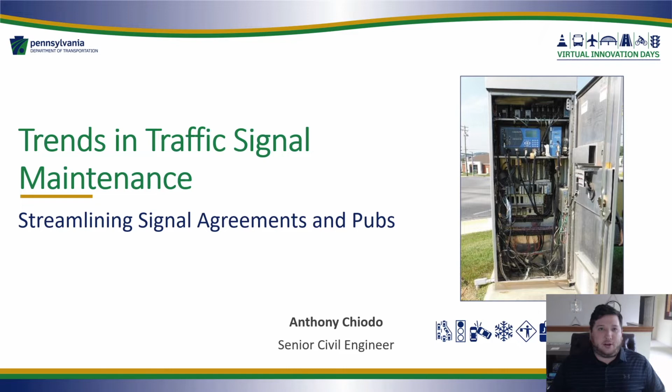Today I'm going to be presenting on trends in traffic signal maintenance. This mainly covers a project that we did back in fall of 2019 with Michael Baker. The main point of the project was to streamline our traffic signal maintenance agreements, as well as update some of our traffic signal maintenance publications.

We also wanted to improve the current traffic signal maintenance agreement process. This involved working with municipalities and consultants and getting a lot of feedback to see what the current process was, how the districts are doing it, and making sure we could streamline it.

To make it a quicker, easier process for all of our municipalities and districts. We also wanted to make sure, as part of this project and making sure that information was correct, that we verified traffic signals are operating per their permit.

This is important because our permits designate signal timings, where equipment should be, and when all this is in place correctly, it ensures that the traveling public gets to where it needs to go safely in an effective manner. Making sure that all that's in line is very important to us.

We also want to encourage our municipalities to do preventative maintenance on their equipment. This is a big step because even though it may be more of an upfront cost, it's important because in the long run, the municipality would probably see savings, especially in cases where if say a traffic pole is neglected for a while and there's a catastrophic failure.

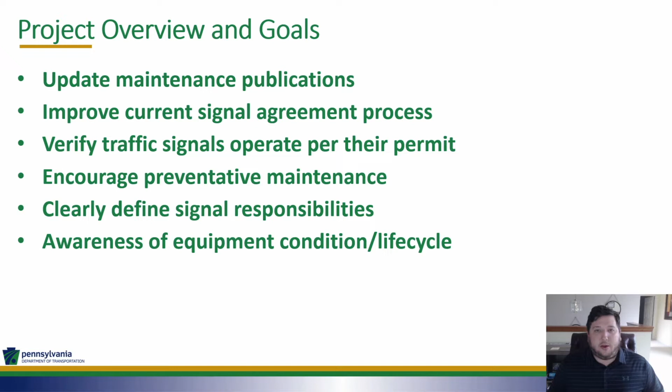So having all this data stored in TSAMs and making municipalities and districts aware of it really helps us from a central office standpoint, as well as gives all that data and information to their respective users as well. It was a big part of this project.

This also includes changes and updates to the TE 160 form, which is what municipalities submit to districts whenever they want to construct a new signal or make modifications to a current one.

The main point in streamlining the signal agreement process is that the TE 160 was revised down to one page and would no longer require a municipal resolution moving forward, but we'll go further into that in a future slide.

Another part of this project, and an ongoing effort of ours in the traffic signal unit, is increasing TSAMS user friendliness. I realize I may have neglected to say what TSAM's stands for in a previous slide.

TSAMS is our Traffic Signal Asset Management System. It's a free site software for municipalities and for us to store traffic signal information, whether it be projects, specific intersection information, permits, or anything traffic signal related — it should be found in TSAMs.

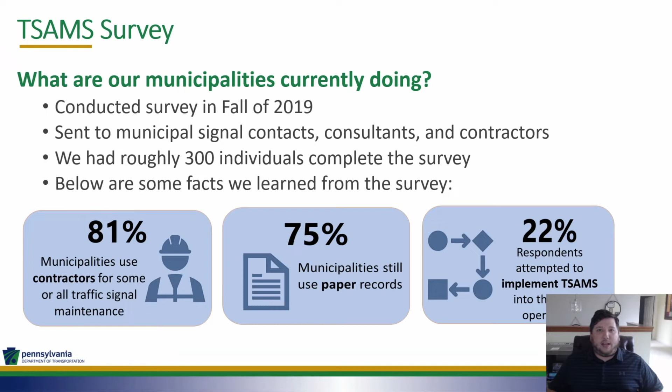The new process we came up with during this project was for municipalities. They would have to go through one more agreement with the state, or sign into a new agreement with us. In this new agreement, the municipality would designate a position within the municipality, whether it be the head of a road crew or the director of public works—whatever position is most relevant for each municipality—to approve their signal permits and to sign off on the TE 160s.

Once they've designated that position and agreed to the other terms in the agreement, they would accept the new agreement with the municipal resolution. From there, they've entered the new process where instead of having a municipal resolution to pass new TE 160s, they could just have that designated position sign off on the TE 160, send it to PennDOT without going through municipal resolution, and update that data in TSAMs, making sure everything is in there correctly.

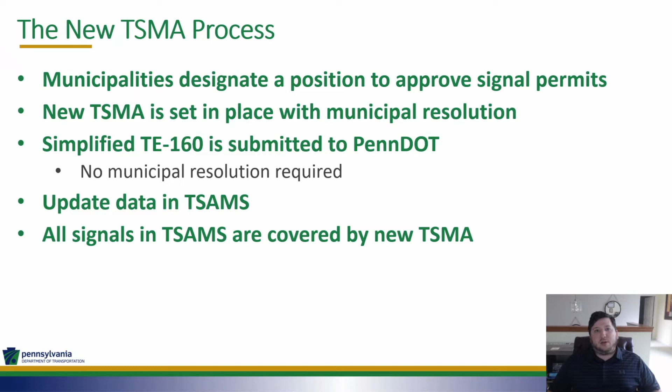As part of the new agreement, there's no longer an appendix list of intersections in the municipality. Any signal in TSAMs that is linked to that municipality is considered part of that traffic signal maintenance agreement. So as long as the list in TSAMs is up to date, the traffic signal maintenance agreement itself is up to date, which was a nice stepping stone for this project.

This is still an ongoing effort though. We're still waiting to get municipal agreements back from a lot of municipalities. We started collecting these earlier this year. We have roughly 1,200 municipalities that own traffic signals in the state of Pennsylvania, and we have about 100 maintenance agreements back now. So we're constantly collecting those, going through the Office of Chief Counsel, making sure these agreements are put in place and that we're going by the books on it.

We're also going to gather feedback from these in the future, and if there's anything policy related that can be updated or changed based on feedback from our current practices, we'll use that to update and maintain our policies moving forward. It's also important to continue to collect and improve data in TSAMs. This is always an ongoing effort in our section, and we've seen an uptick in some data being collected by municipalities after these agreements have been put in place, so that's good.

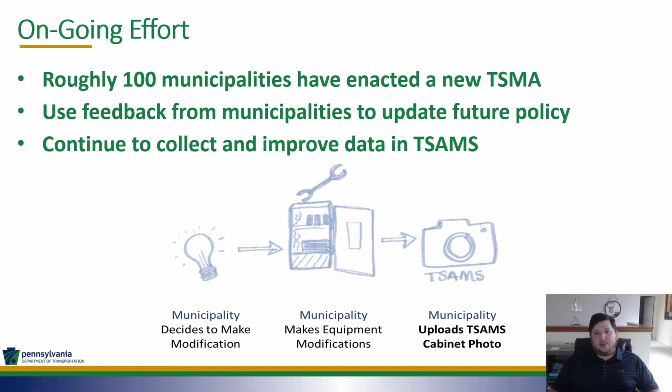At the bottom of this page is a little hand-drawn diagram of the thought process when it comes to inputting data into TSAMs for the municipalities. They decide to make modifications, they make those modifications, and as part of the agreement, they upload a cabinet picture into TSAMs. This makes sure that at the very least we have data in TSAMs that shows what's in the cabinet, and that's important data to have, because for those who know what they're looking at, being able to see a recent picture inside the cabinet really gives you a good idea of what's in there.

Some lessons learned from this project and some COVID adaptations we had to make. Communication is key. This is probably a lesson learned from every project out there, but it's still worth noting. When you're working with so many different stakeholders and people, it's important to be aware of what everyone's going through, what everyone's thinking, and make the best decisions based on the input you have. It's important to keep that communication up between all parties involved. Based on that, collecting feedback while keeping up communication—see how people feel about your changes, what makes sense, what doesn't. Anything you gather, you can use in future updates, future projects, and to streamline your own processes.

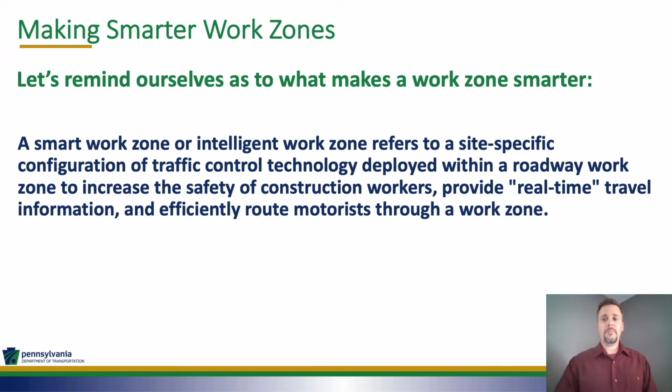As defined by the United States Department of Transportation, there are 5 strategies that can be incorporated to make work zones smarter. Those strategies are speed management, traveler information, reducing exposure, managing traffic, and performance monitoring.

As you might expect, PennDOT has already begun to utilize smart work zone technology that complies with the categories discussed on the previous slide. While some approaches are more visible to the public eye, such as late merge and automated speed enforcement, other approaches, while beneficial, are not as easily recognizable. Queue warning systems, as managed by our Transportation Systems Management and Operations Unit, have been deployed on several key corridors across the Commonwealth, with noticeable success.

However, what I would like to discuss today is a recent pilot of smart work zone devices that occurred along a safety corridor project in Lycoming County within PennDOT's Engineering District 3.

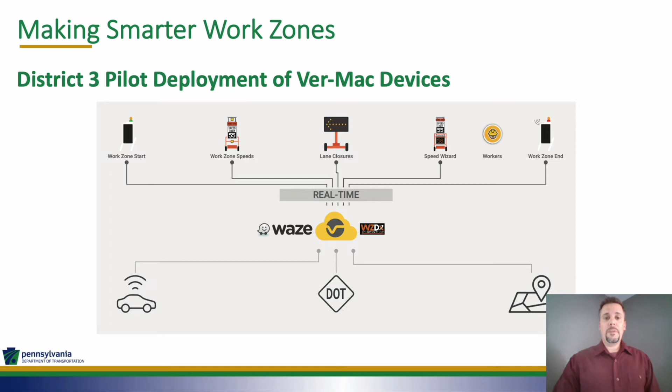Earlier this summer, a national manufacturer of work zone devices requested to share with the department, as well as the Pennsylvania Turnpike Commission, some items from their new product line. These products meet the definition of smart work zone devices because they can provide real-time data and situational awareness within active work zones by communicating via the cloud to the work zone data exchange, as well as third-party vendors such as Waze and Google and others. This critical information can then be communicated to approaching road users via their smartphone devices, as well as directly to the department and the commission through their ATMS platforms and the PA 511 Traveler Information System.

Since the department saw the benefit of deploying one or more of these devices along an active work zone for the purpose of gathering information and providing solidification of data we are already receiving through other platforms, such as our automated speed enforcement program, rather than taking the parking lot approach by simply walking around the devices and kicking the tires, we worked through a regional supplier that works with the manufacturer and requested to place several of these devices on an agreed project to witness the benefits for future use.

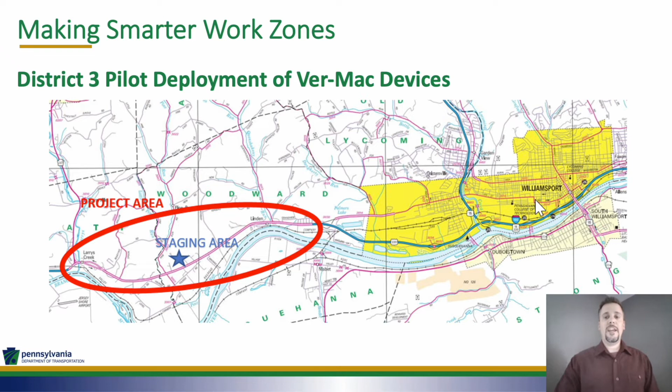The project that was selected is along the US 220 corridor between Jersey Shore and Williamsport, Pennsylvania, in Lycoming County. This project consists of multiple work areas within a 6 to 7 mile stretch that has long-term lane shifts, one or two long-term lane closures, as well as intermittent short-term lane closures throughout any given point of the week. This route is a north-south commuter route that garners at least 20,000 vehicles per day or more.

Of the products available by the manufacturer, on the screen are 4 devices that were selected by the department and the commission for the pilot deployment on the project. Through the remaining slides, I will get a little more detail on each device and how they were deployed, and then I'll wrap up by discussing some of the successes and challenges we observed during use of these devices as part of this pilot program.

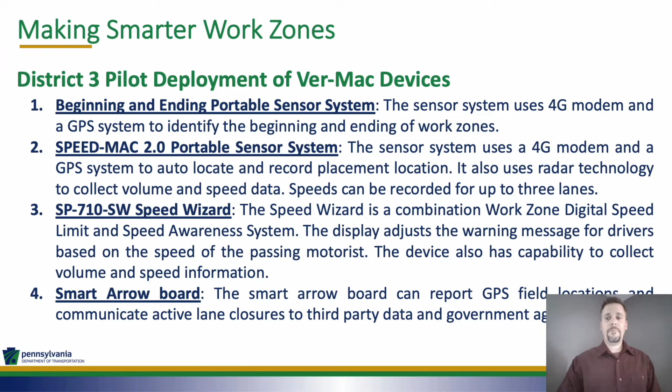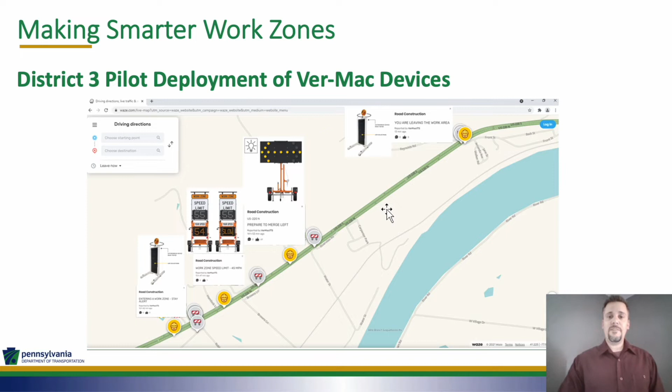For the deployment of smart work zone devices, the Bureau of Maintenance and Operations worked with the vendor, the supplier, the District 3 project staff, as well as the contractor to develop the locations where these devices could be deployed. In some instances, existing devices such as arrow boards and speed display signs that were already part of the project were simply removed and replaced with the smart work zone devices that effectively perform the same functions, but in an enhanced capacity.

The first device we're going to talk about is the beginning and ending portable sensor system. This system looks much like a traditional Type B light that is historically installed on signs and channelization devices. However, rather than illuminating, they contain a 4G modem and a GPS system that communicates through the work zone data exchange and through the cloud to push notifications to road users related to where a work zone begins and where a work zone might end. This information can be communicated to road users through Waze and Google applications, with the intent to eventually communicate through an autonomous and connected vehicle system.

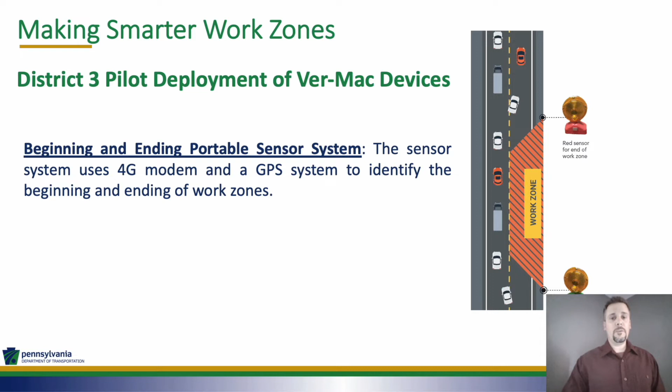Much like the beginning and end portable sensor system, we also deployed a SPEED-MAC 2.0 portable sensor system that utilizes a Type B light housing unit, which can be attached to a MASH compliant solar vertical panel. The sensor system also uses a 4G modem as well as a GPS system to auto-locate and record placement location. It also uses radar technology to collect volume and speed data, with speeds recorded for up to 3 lanes of traffic. This system was useful in providing field verification data collected through the automated speed enforcement program, as this project has been identified as an ideal candidate which sees regular automated speed enforcement throughout any given week.

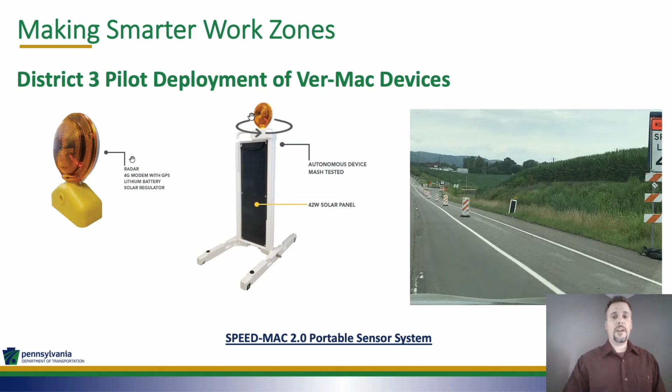The Speed Wizard is a combination work zone digital speed limit and speed awareness system. As you can see, it looks much like our standard speed display signs that are deployed among many of our work zones across the Commonwealth, as well as utilized by many safety sections within PennDOT to help enforce lower speed limits in communities and along school areas as well.

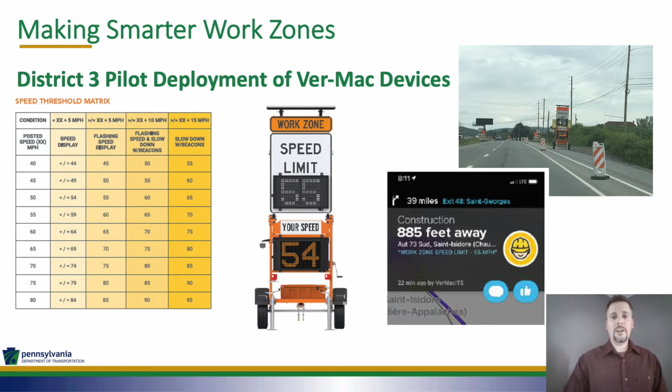The lower speed display adjusts the warning message for drivers based on the speed of the passing motorist. By using a matrix as shown on the left side of this slide, the Speed Wizard's lower display can adjust based on this speed threshold provided by the posted speed limit on the above display. If a passing motorist violates a certain speed threshold, the numeric display can change to read 'slow down.' The device also has the capability to collect volume and speed information, which can again be verified against our automated speed enforcement program for its capabilities, verification, and accuracy.

The last device I want to talk about is the Smart Arrow board. For most people, including the work crews and road users, the Smart Arrow board does not look any different than any standard arrow board. In fact, the work crew installs and activates it just like any standard arrow board. However, the Smart Arrow board can report GPS field locations and communicate active lane closures to third-party data and government agencies.

This is achieved via a modem and a GPS unit attached to the back of the arrow board. When activated, it instantly begins pushing information to the work zone data exchange and cloud services, reporting its location and its current mode, meaning left lane closed, right lane closed, or caution mode. The Smart Arrow board will also report any changes to its position and which mode it has been changed to, whether it changes from a left merge to a right merge, instantaneously.

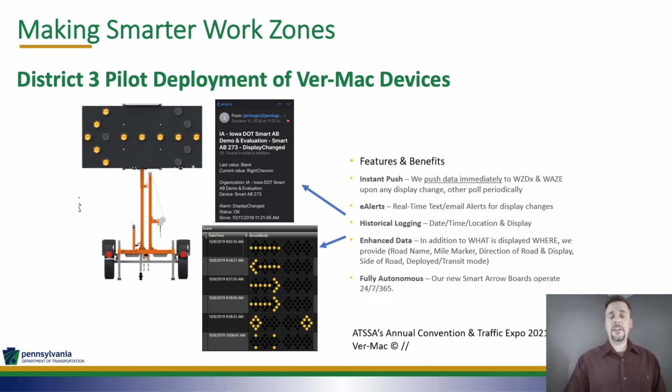Project management personnel can receive text alerts to its location and merge mode upon activation, modifications, and deactivation throughout the course of the day. This also helps ensure motorists are seeing the proper work zone messaging as they approach, so they can adequately and appropriately adjust their speeds, their driving behavior, and if need be, change lanes prior to getting to the merge point of the work zone.

So lastly, successes and challenges. Of the devices that we discussed here this afternoon, on the left side of the slide you see some of the successes. First and foremost, I want to thank District 3 staff as well as the contractor staff for being willing to work with us on this pilot program.

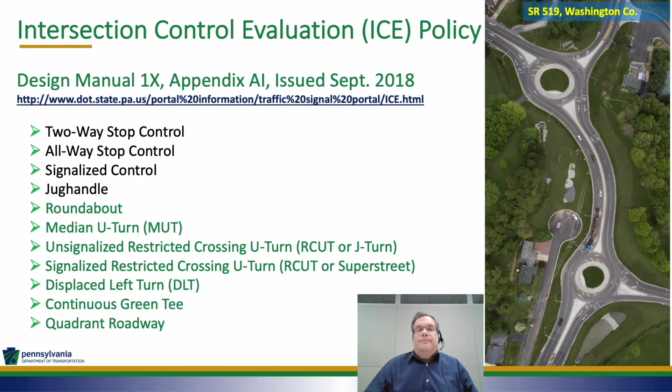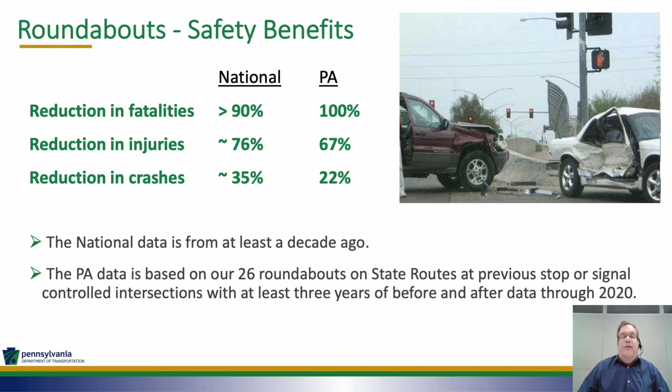But you have to keep in mind there are other benefits to roundabouts. They can be up to 30% more efficient than signalized intersections during peak times, and you have pretty much no delay during off-peak times. They also reduce emissions because of the nature of the continuous flow. They have significant traffic calming benefits because they geometrically restrict the speeds of vehicles. And there's beautification aspects for gateways to communities and so forth.

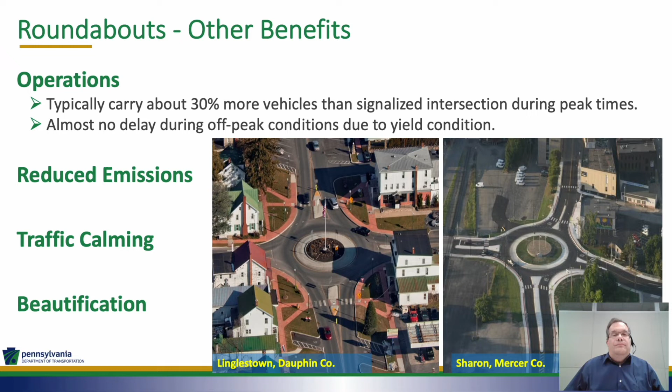As far as roundabouts being implemented throughout the state, we built our first roundabout in 2005. We now have a total of 62 roundabouts currently on state routes, 77 overall within the state, 20 more in construction that aren't open to traffic, and another 30 or more in design.

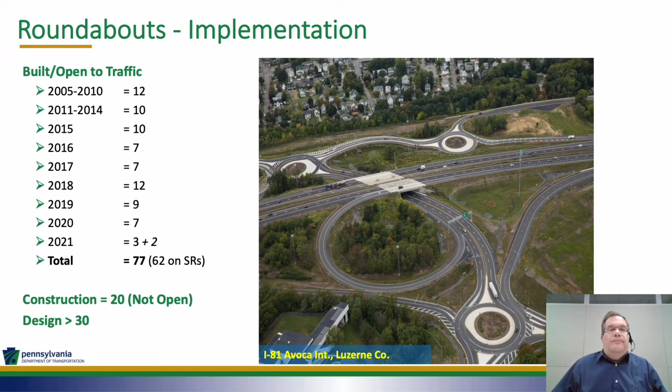Other innovative intersections, from the previously shown list, that should be considered for significant intersection upgrades: median U-turns, restricted crossing U-turns, displaced left turns, continuous green Ts, and quadrant roadways. The Federal Highway Administration has a guide for median U-turns, restricted crossing U-turns, and displaced left turns, which you can find on their website.

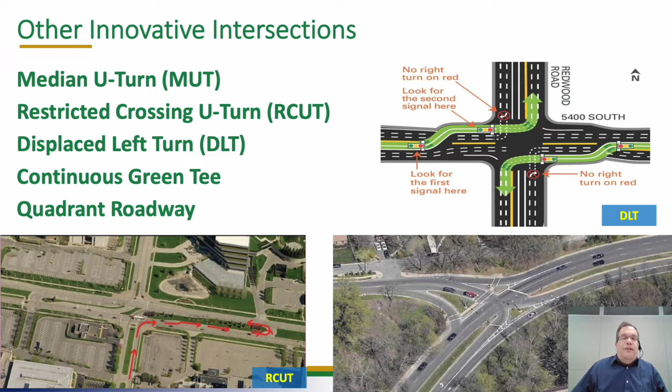As for diverging diamond interchanges, similar to the other innovative intersections, the primary idea is to get the high left turning traffic volumes to turn while the through traffic in the opposing direction continues to travel, avoiding excessive delays. They also improve safety by having fewer conflict points than typical signalized intersections. And frequently they use up less right of way than other interchange types.

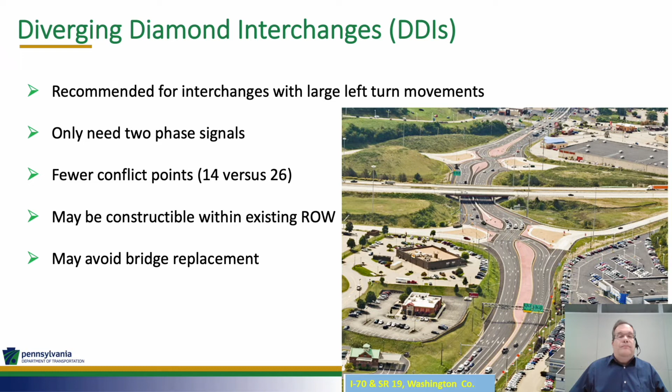DDIs have been built throughout Pennsylvania and are under design. Our first one was in Washington County on I-70 at SR19, which opened back in 2016 and is performing quite well. Two recently opened in District 8, one at I-83 Exit 4, and the other at SR322 and SR222 in Lancaster County, which you'll be hearing a presentation on here briefly.

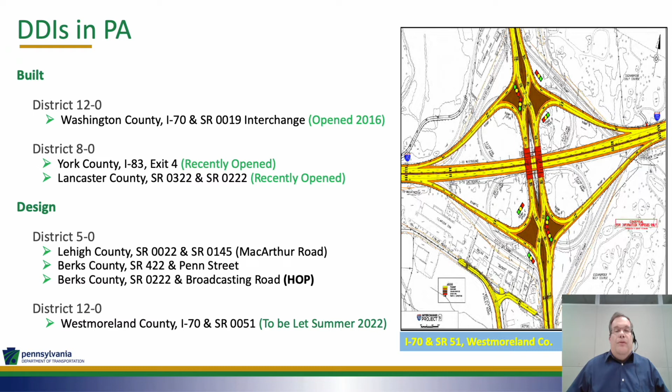And under design, there are several in District 5, and the image shown here is of the one proposed in Westmoreland County in District 12 that is to go to construction next summer.

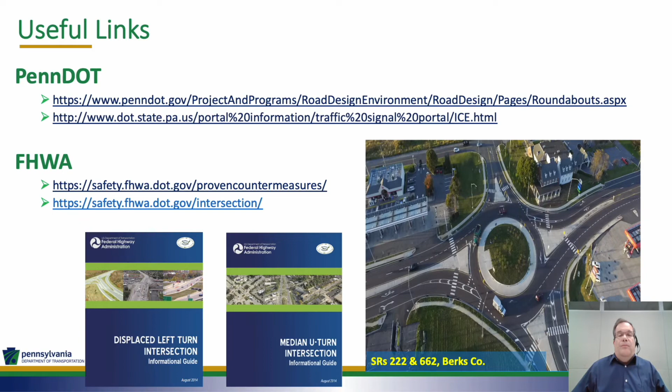Here's some useful links. The first one is the link to the Roundabout website within the PennDOT website. The second one is the link to the traffic signal portal, which I mentioned earlier. And then a couple links to the Federal Highway Safety website. The first one will go over roundabouts, and the second one will cover various other intersection types, including displaced left turns and median U-turn intersections.

We wanted to start off by mentioning the team that worked hard to produce this successful project. Our project team was led by Dave Fertangeli of PennDOT District 8, who was unfortunately unable to join us for this presentation. Barb Karsak-Anderson led the PennDOT construction team. Our consultant design team was led by WRA, with assistance from Stantec Consulting, Wallace Montgomery, Skelly & Loy, Susquehanna Civil, and SAM. Finally, the contractor for the project was JD Eckman, with CM High and Signal Control Products as key subcontractors.

Now, let's touch on the project history and project location. The project is located at the existing SR322 and SR222 interchange, just east of Ephrata in Lancaster County, District 8. The project was initiated in July 2013 as part of a road safety audit, which recommended an interchange alternative analysis be performed. In December 2013, a DDI feasibility study was performed that determined a DDI would be a feasible solution and provide safety and operational improvements.

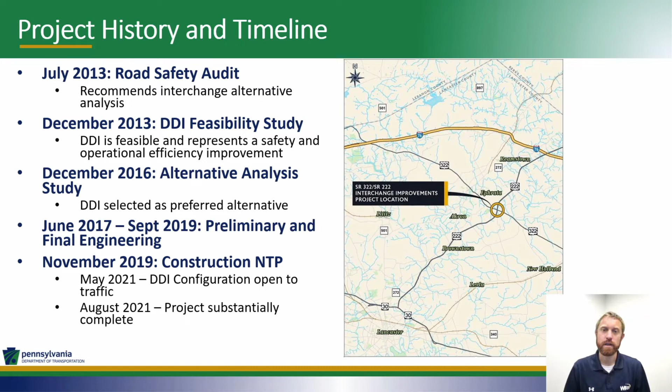In December 2016, our team completed a comprehensive alternative analysis study. Following the study, PennDOT selected the DDI as the preferred alternative. From there, the project spent a little over 2 years in design, and the construction NTP was issued in November of 2019. In May of this year, the DDI opened to traffic, and the project is now substantially complete.

The primary purpose of the project was to improve safety. After reviewing the crash history at the interchange, we felt that the best way to accomplish our goal of improving safety was to: 1. Reduce the number of conflict points within the interchange, which naturally reduces the opportunity for accidents to occur. 2. Eliminate the SR322 left turn and opposing through movement conflicts through the interchange. The existing crash data indicated that this conflict resulted in 43% of the angle crashes and 43% of the rear end crashes within the interchange.

3. We wanted to reduce the number of and severity of future crashes. The existing crash data indicated that 46% of the crashes resulted in injuries.

While our primary purpose and need was safety, we also identified 2 other project objectives. We wanted to improve safety, but we didn't want that to come at the cost of degrading traffic operations or multimodal transportation. For traffic operations, we wanted to reduce queuing on SR322 as well as the off-ramps from SR222. As for the multimodal operations, we recognize the importance of ensuring that pedestrians, bikes, and unique to this particular project, horse and buggies, were accommodated due to the significant presence of the Plain Sect community in the area.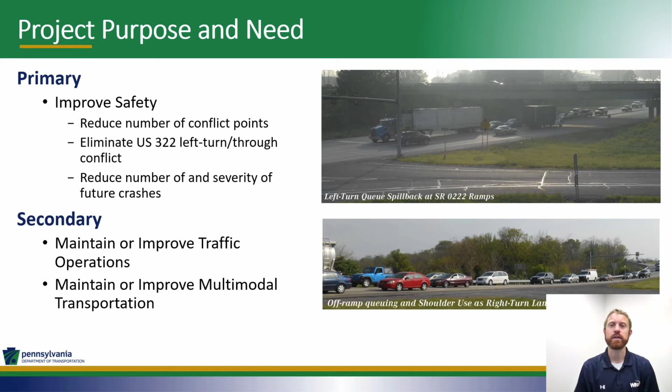After diving into the project, we developed a more specific list of issues that we wanted the project to address. With the goal of the project being to improve safety, we wanted to address the high number of reported injury crashes due to the frequent angle collisions at the SR322 intersection with Sheetz Walmart, as well as for the unprotected SR322 eastbound to SR222 northbound movement due to the lack of a traffic signal.

From a traffic operations perspective, there were frequent backups on SR322 eastbound at the Sheetz Walmart intersection. Short left turn lanes cause traffic to routinely back up into SR322 travel lanes in both directions, which also becomes a safety issue. On the SR222 off-ramps, a lack of a formal right turn lane leads drivers to use shoulders, and traffic routinely backs up on the ramps during peak periods.

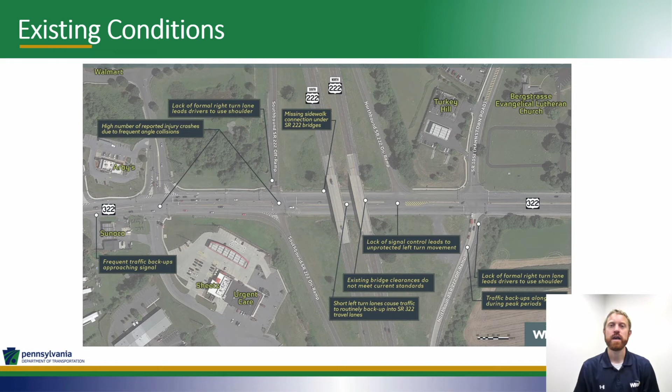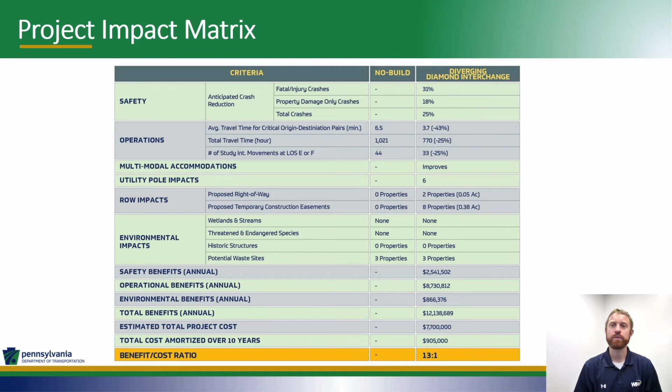In addition, we wanted to address the missing sidewalk connection under the SR222 bridges and also improve the substandard bridge clearance. Our team initially investigated 5 alternatives before settling on 3 alternatives for further development. After comparing the 3 alternatives, it was decided that the DDI met the primary and secondary purpose and needs, and also provided a 13-to-1 benefit to cost ratio, which was the best of the 3 alternatives.

The major benefits of the DDI compared to the other alternatives is that it improves safety by reducing the number of conflict points from 28 to 14 as compared to the current diamond interchange. It reduces travel delay by utilizing 2-phase traffic signals with short cycle lengths at the ramp signals. It increases the capacity of the turning movements on and off the ramps. It utilizes the existing SR222 bridges and generally maintains the same footprint, thus requiring minimal additional right-of-way. Finally, it also accommodates multimodal transportation, which, given the presence of the Plain Sect community, was a critical component to the project.

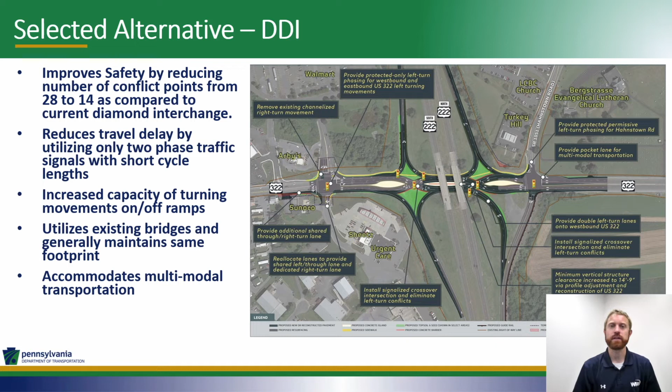We wanted to take a minute to quickly explain how the DDI works for those that may not be familiar with how one functions. The graphic on this slide shows how all of the movements are made in a DDI. The DDI is unique from a standard diamond interchange in that traffic on the minor road,

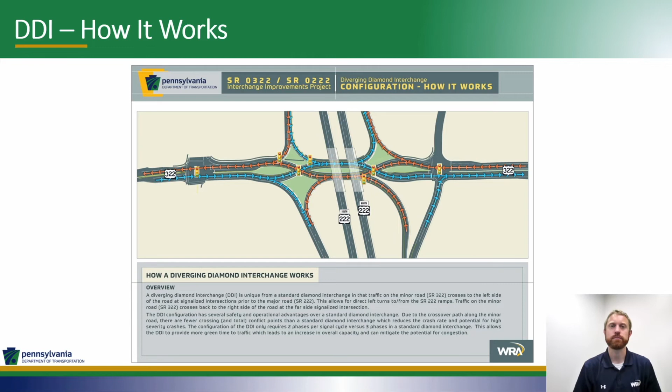which in this case would be SR 322 running left and right on your screen, temporarily crosses to the left side of the road via signalized intersections on either side of the major road, which in this case is SR 222. This allows for direct left turns to and from the SR 222 ramps without crossing conflicts with SR 322 traffic. Traffic on SR 322 then crosses back to the right side of the road at the far side of the signalized intersection.

Now let me get into some of the nuts and bolts of the geometric design considerations for the project. Since this project is at the interchange of two major state routes, we had to ensure that larger design vehicles, such as WB67s, could make all movements and run concurrently with other vehicles. Similar to roundabout design, this requirement was often at odds with the necessary curvature of the roadways, which required careful placement of curb lines.

Secondly, and possibly most critical to a DDI's geometry, is the design of the crossover intersections. A 45-degree crossover angle was selected, which is the recommended minimum value to deter wrong-way maneuvers.

Due to the location of the nearby Sheetz, Walmart, and Hahnstown Road intersections, the tangent length between crossovers had to be kept to a minimum, which in this case was between 120 and 130 feet. This provided greater and more desirable spacing from the adjacent intersections, and fortunately, the wider resulting cross-section could be supported beneath the existing SR 222 bridges.

A review of natural vehicle paths through the crossover intersections was performed to evaluate the potential for path overlap. Finally, concrete glare screen was strategically placed within the median between crossovers and on the right side of the near side approaches to create a blinder effect and impede the view of opposing traffic as drivers cross over to the left side of the roadway.

Ramp design was also critical to properly align with the crossover intersections, and a new SR 222 northbound ramp spur to SR 322 westbound was added, which provided a more direct route for that movement and improved operations at the Hahnstown Road signal. The final design element I wanted to mention is the vertical clearance under the SR 222 bridges.

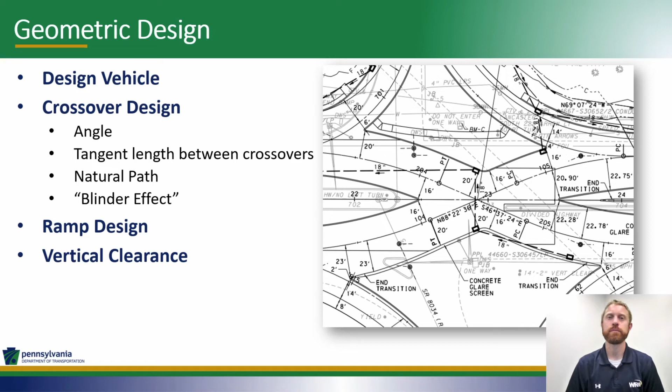Thanks, Brett. In addition to unique geometric design considerations of the DDI design, we wanted to highlight some traffic design elements of the project. Due to the closer proximity of the DDI crossover intersections, progression between both crossovers is critical to operations. Therefore, one traffic signal controller was utilized to control both crossovers.

Traffic signal timings emphasize queue management and progression for critical interchange movements. Other traffic signal design elements included the installation of radar detection and emergency preemption.

Left turn phasing at adjacent signals utilized flashing yellow arrow indications to maximize both safety and operations. The project also included the installation of a CCTV at the interchange and took an innovative approach to backhaul communications by utilizing a shared connection for the CCTV and traffic signal system that eliminates long-term service costs for the municipality.

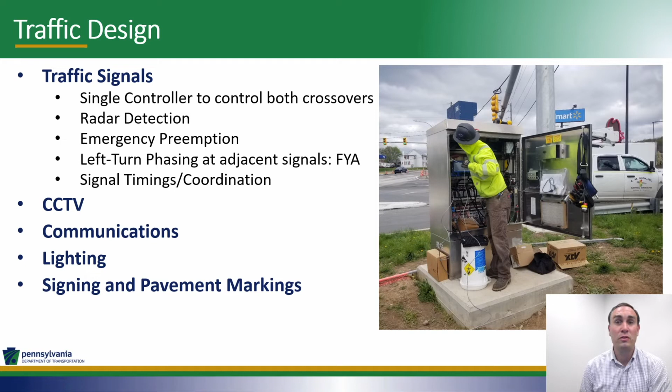Lighting was also installed along 322 and at critical ramp decision points. Enhanced signing, including overhead guide sign structures along 322, were installed, and recessed pavement markings were provided for improved long-term durability.

As mentioned previously, ensuring appropriate multimodal accommodations was a priority of the project, especially due to the large Plain Sect community that utilizes 322. The project improved pedestrian connectivity and accessibility along 322 through the project limits by completing a missing sidewalk connection and installing and upgrading pedestrian facilities to meet ADA guidelines.

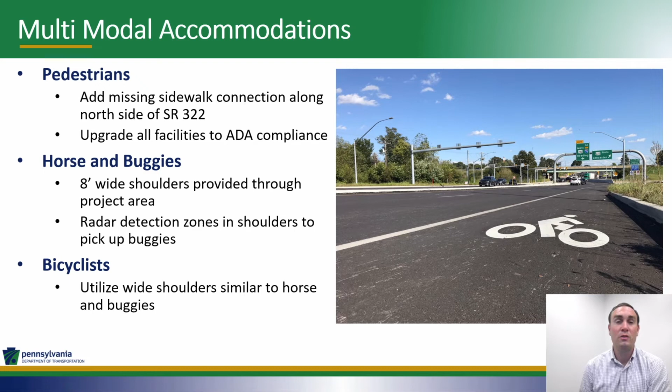8-foot wide shoulders were provided throughout the project area for bicyclists and horse and buggy traffic. Radar detection zones were included in shoulders to detect horse and buggies so the traffic signals could work correctly during periods when vehicular traffic may be lower.

Based on feedback received following outreach events, attendees felt more comfortable with the DDI as the correct solution. Because the Plain Sect community travels through the DDI using non-vehicular modes of travel, we met with them specifically to show how we envision pedestrians, bicyclists, and horse and buggy traffic navigating the DDI. We wanted to make sure the facilities being designed would be used as intended. The Plain Sect community agreed with all of the project's provisions and were very appreciative to be involved in the design process.

We wanted to share a few items that could be considered with future DDI projects. The first relates to having lighting installed in advance of the DDI switchover. Our schedule provided sufficient time to allow for installation of the permanent lights prior to the switchover. However, excessive pole fabrication delays and accelerated construction due to COVID-19 presented an unexpected challenge. In response, we performed a photometric analysis to determine a low-cost temporary solution to ensure the interchange was lit for the traffic switch without delaying the overall construction schedule.

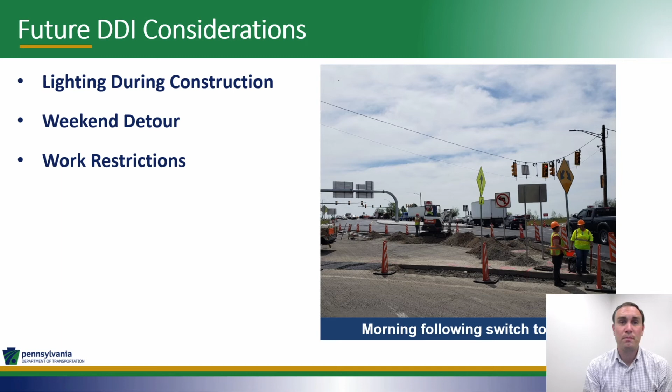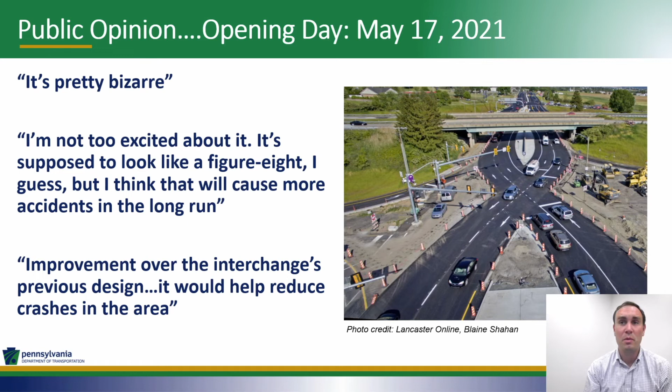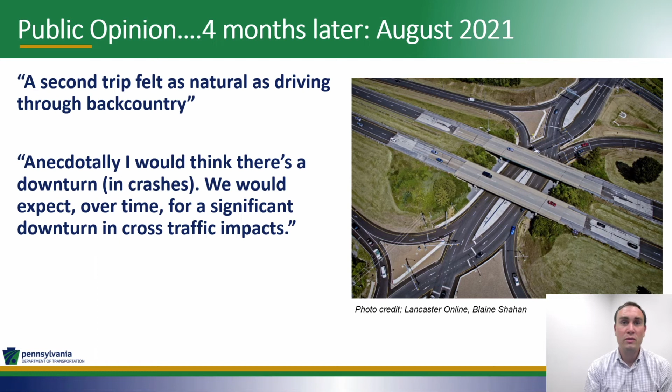The DDI was opened to traffic on May 17, 2021. As expected, public reactions were mixed, as the traveling public used the DDI for what was likely their first time in an interchange of this type. Observations and minimal complaints over the next few days indicated the public was navigating the DDI successfully. Fast forward four months to August of this year, and overall the reviews seem positive, with drivers becoming more familiar with the interchange. Although it's too early to tell the long-term safety performance, left-turn and angle crash types appear to be minimized.

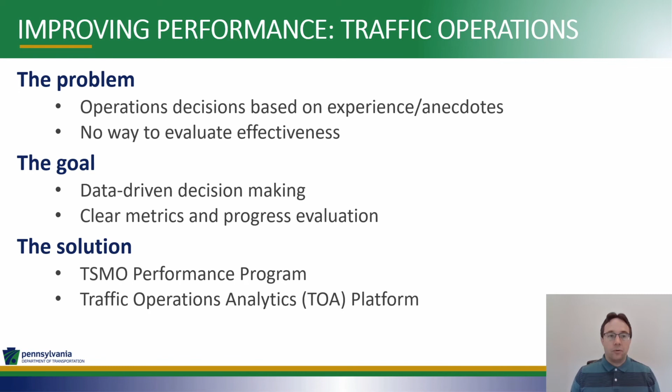As a result, the PennDOT TSMO Performance Program was created, and one of the first efforts of that program was the development of our Traffic Operations Analytics, or TOA for short, platform. Our goal in creating the TOA platform was to bring together a variety of data sources that would better help us understand where crashes and other traffic incidents were occurring and how well we were responding to them.

The initial implementation of TOA brought together data from both PennDOT and third-party sources. The PennDOT sources were our crash record system, which has information on all reportable crashes occurring throughout the state, as well as our road condition reporting system, RCRS, which is our real-time database of all incidents and roadwork that our traffic management personnel are aware of on state roads. The third-party data included crowdsourced incident data from Waze and traffic probe speed data from INRIX.

These data sets were correlated to give us a much more complete and clear picture of where incidents were occurring on our roadways. Once the data was correlated, Microsoft Power BI was used as the front end to create reports and visualizations that could in turn be used to turn the data into actionable information. TOA has since expanded to include a number of additional department sources, such as our weather station data, our maintenance database, our ITS locations, and our DMS message histories. That's allowed us to continue to perform additional analysis across a wider variety of areas.

All told, we now have a massive database in excess of 30 terabytes, and that's expanding daily.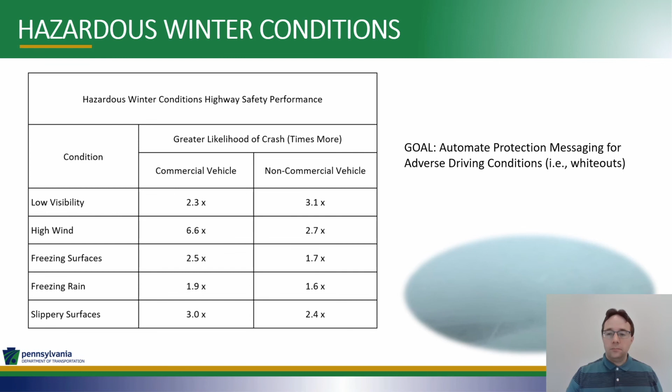We've also done an analysis on the incidents that cause full roadway closures on our core network during these hazardous conditions, looking at both how long the closure lasts and the incident influence time. Incident influence time is defined as the time from when the incident occurs until traffic speeds have returned to historical norms. The majority of these closures involve commercial vehicles, and those closures have a significantly longer impact on traffic, both in terms of how long the road is actually closed and how long it takes traffic to get back to normal after the incident is cleared.

This information is providing support and justification for the commercial vehicle restrictions that we place on our core roadway network during winter storms, in order to help with traffic operations and keep the roads moving during those storms.

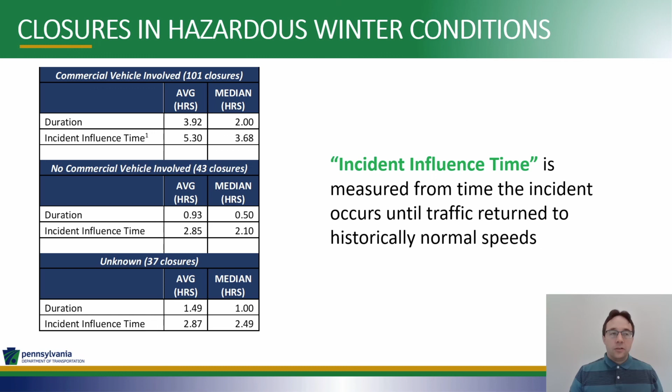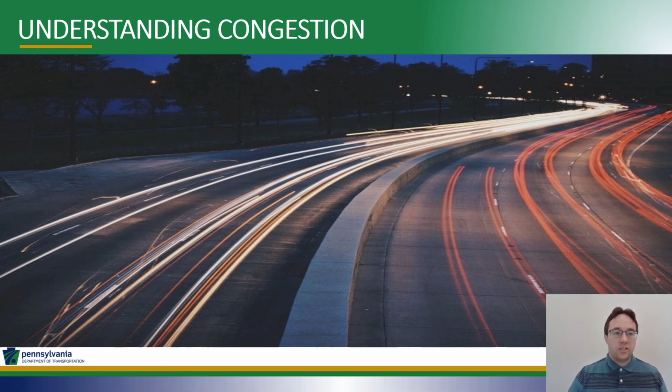In addition to improving incident response, another goal of the TSMO performance program is to help operations and planning personnel better understand the nature of congestion on the roads that they're responsible for so that they can better design solutions to address that congestion. To that end, the TSMO performance program developed and released in early 2020 a first of its kind congestion pie chart, based on real data from the data sources that we have, developed for our core roadway network.

The pie chart tool breaks down congestion by its primary cause, as seen here. Causes identified for use in this pie chart are roadwork, crashes (both major and minor), other traffic incidents, weather, recurring congestion, rubbernecking from traffic events on the other side of the road, and congestion for which we are unable to identify a cause with our available data, which is a relatively small percentage of the total. The tool provides the ability to look at congestion for a variety of geographies, as seen here.

I provided a chart for the entire core network in Pennsylvania, and then you can also go down and see the metro Pittsburgh area for our core road network, and then you can even look at a specific route, I-376, in a specific county, Allegheny County, right in the Pittsburgh area. As of this year, the tool can also go down to the municipality level.

The original pie chart tool was released with 2018 data, and we've updated it annually ever since, 2020 being the most recent year available, and that's the data that I've supplied here.

The congestion pie chart has been utilized within our department for the development of our regional operations plans, as well as other planning efforts, and is being reviewed by operational personnel so they have a better understanding of congestion in their region.

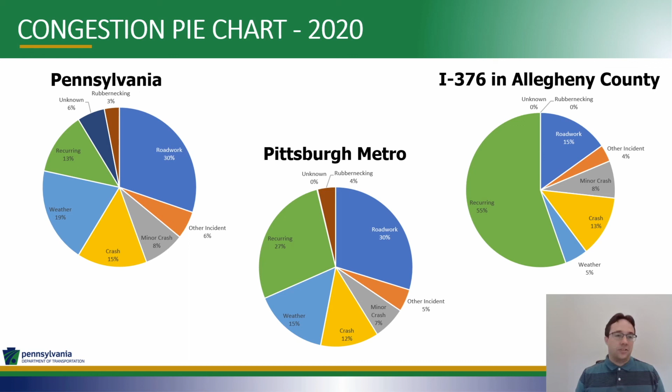Like every other area of life, traffic and traffic operations have seen a significant impact as a result of the COVID-19 pandemic, which began impacting PA in a significant way in March of 2020. Due to various mitigation efforts, traffic volumes on the core roadway network fell dramatically in the spring of 2020, and while they have recovered throughout the summer and fall and into this year, they remain roughly 5% lower than pre-pandemic levels due to increased teleworking and other factors impacted by the pandemic.

Less people traveling obviously means less congestion, and while we did not see a significant shift in the breakdown of congestion types, the congestion pie chart tool did allow us to see the overall drop in congestion as depicted here with this stacked bar chart. You can see a significant decrease in the amount of total congestion from 2019 to 2020, and that total impact of congestion on the core road network fell by 73% in 2020.

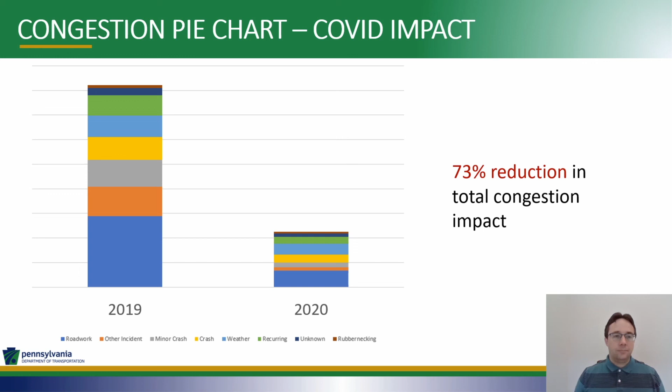Another tool that we have developed recently in order to help our operations personnel and other interested parties better understand the congestion in their area is our congestion calendar tool, seen here. This tool provides a clear visual picture of congestion on a road or a set of roads for each day of the year, so that you can quickly identify when your trouble days might be and be able to analyze potential causes and solutions.

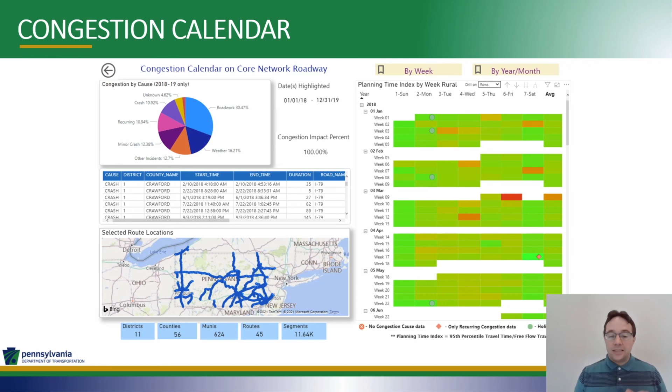The tool also includes the congestion pie chart data for the days where we have it calculated, so that if you click on a specific day, you can quickly see what was causing the congestion on that day. Like our other tools, this one can provide data down to the route, county, and even the municipality. This concludes my presentation.